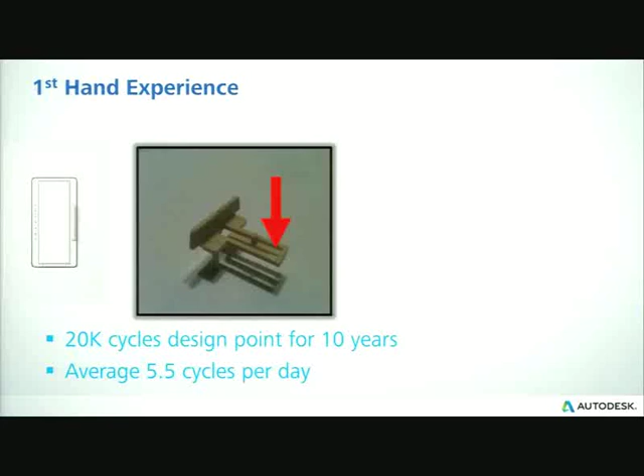So then we built temporary tooling to make some prototypes out of molded plastic. And the thermal side of the problem: in lighting, when you dim a light, you generate heat. So we knew there was a thermal problem.

Right. But we simulated the mechanical problem, and we decided that we would just use physical testing to validate the mechanical problem worked when the electronics were heating up the system.

This product was a very high volume product for Lutron. It was a very important project. When this was put to market, after 3 months, 80% of the products came back because they failed. The plastic broke right where that red arrow is. And we were left embarrassed and confused.

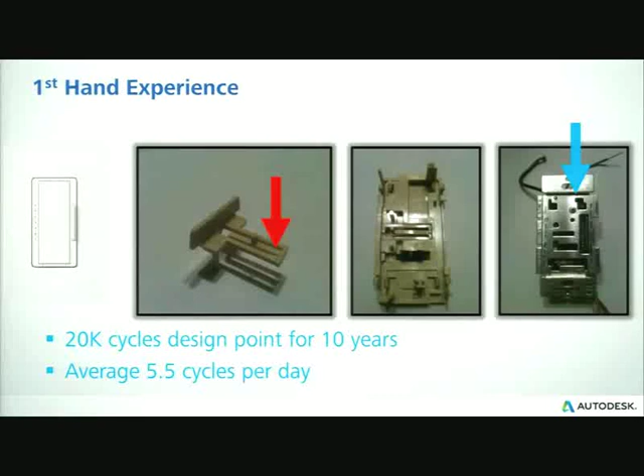What did we miss? So we thought we had a good virtual and physical test plan to build a reliable product. What we missed was that the thermal load isn't constant. So we heated up the dimmer and cycled it very fast. But actually what happens when you cycle it 5.5 times a day, it heats up and then it cools down. It heats up and then it cools down.

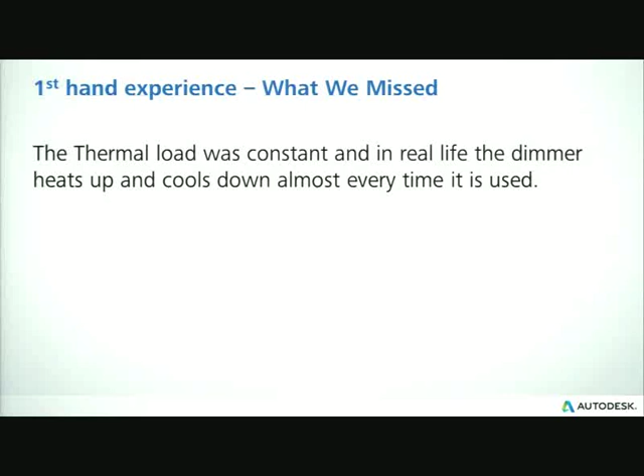So we were cycling on and off every second. After doing some more simulation work with CFD, now we're able to look at the cooling as well as the heat transfer in the mechanisms to identify that it took 30 minutes for the product to fully cool down. So after we adjusted the cycling to 30 minutes, the product failed after 300 cycles, not 20,000.

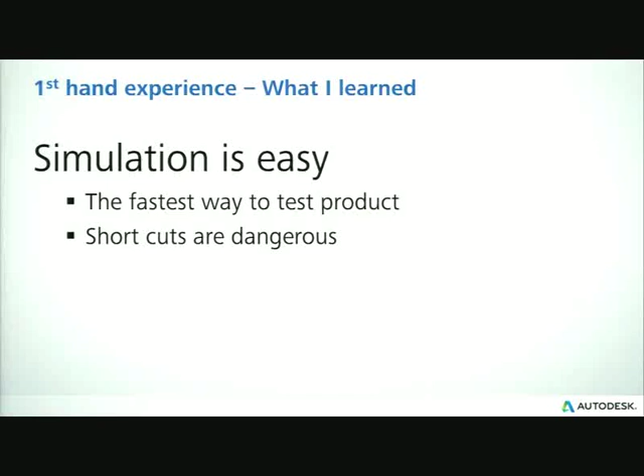It's a lot faster than doing physical testing, so you can make a lot of mistakes inside the computer and do abuse testing a lot quicker. Without exploring your design functionality in simulation completely, you end up taking shortcuts, and those end up being very dangerous to quality.

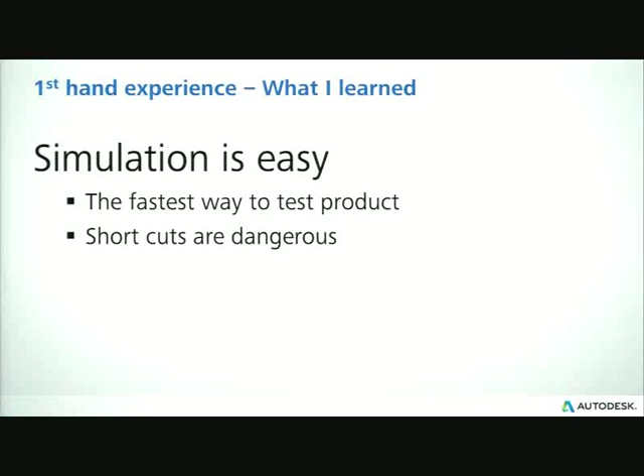The other thing that we all decided was design is what's hard. Designing quality products, designing innovative solutions is a real challenge. Just physical testing makes it take a long time, and you can't abuse test everything. So our goal inside Autodesk, we're a design company, we have great design tools. We're now providing simulation tools for you to make your designs easier, faster, and more reliable in a virtual environment.

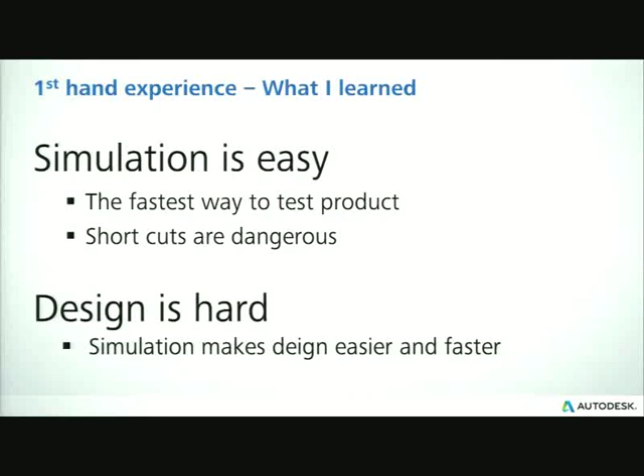Going to switch my machine here so I can show you the product and do a demonstration. It's going to take me a second, so please be patient.

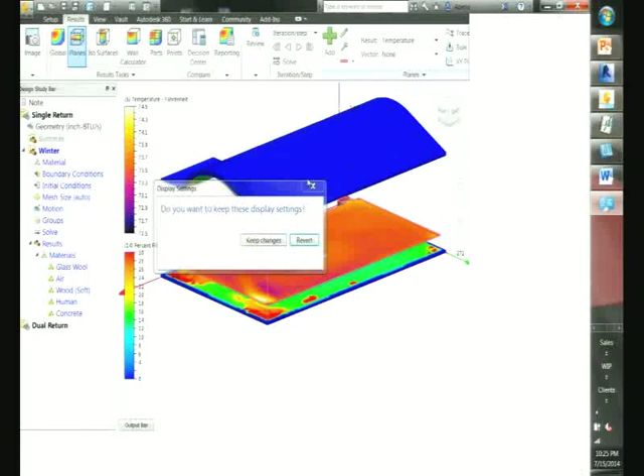We have people in the room today that work in all different types of industries, and as you can imagine, I've been exposed to a lot of them. I have deeper experience in some than others. But one thing I've learned over the years is that simulation speaks the common language of studying your designs and making them better. So what I wanted to show you is something that everybody can understand.

We all work, live, and shop and eat inside buildings. Buildings can be hot, cold, comfortable, or uncomfortable. So I want to show you a demonstration of how simulation is being used to understand the ventilation systems and the solar loading from the windows. Whether you're looking at airflow and heat in a building, an electronics box, or a valve, the workflow is very similar, but how you set the model up is different. When you go through the workshop today, you'll learn the setup for your specific industry.

So just imagine with me, you're building this room.

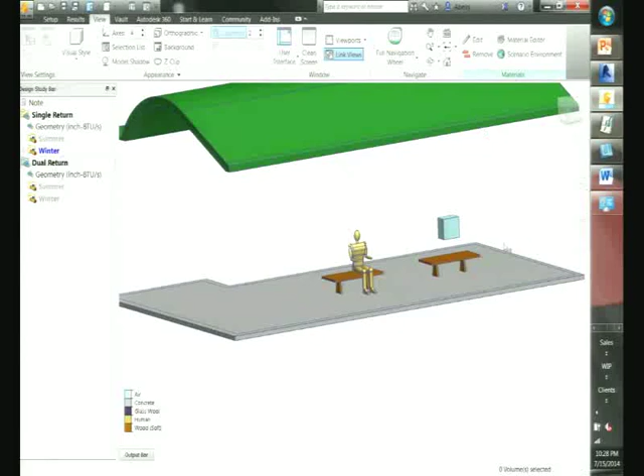So in this room, we have Mark Ma sitting on a bench looking at some really nice piece of artwork. Up top is where the air supply comes in, and down below is where the return is down at the floor, that's where the air leaves. Air comes in, air leaves.

Inlet, outlet. So where the heat comes from, we can model summer conditions and winter conditions.

We can set up to be heating or cooling. We can look at the energy from solar loading, how much energy, and what the external environment is to match these things together. Just like if you're designing electronics for the military or an electronics box, it's going to live in another system somewhere, so it breaks down the system.

So we have heating or cooling, and then we also have the heat from people. People generate a good bit of heat. So the challenge is to design the ventilation system to cool the space uniformly in the summer and heat it up uniformly in the winter.

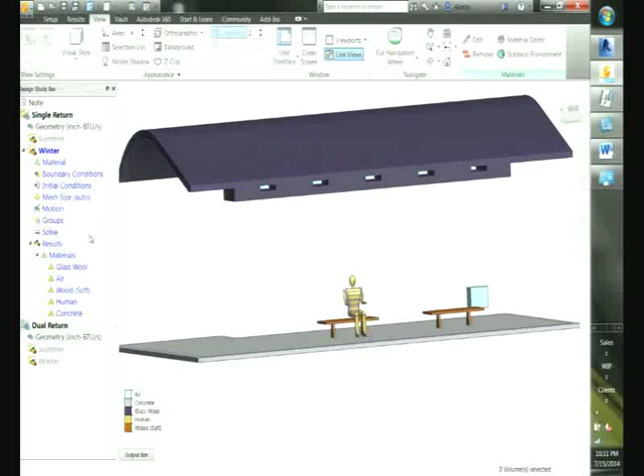Okay, so let's look at some of the results. Simulation is always about looking at the invisible. Let's be able to visualize the air, visualize the heat. Now it's just like any other solid or mechanism that you built. You can learn how to optimize it once you can visualize it.

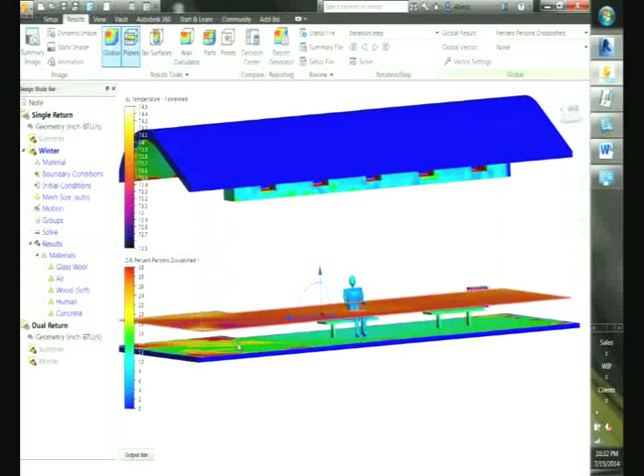So right away, put a plane right where the individual is, and we can see what the temperature looks like. It's around 70 Fahrenheit. We can switch units to Celsius, make it a little bit easier for everybody.

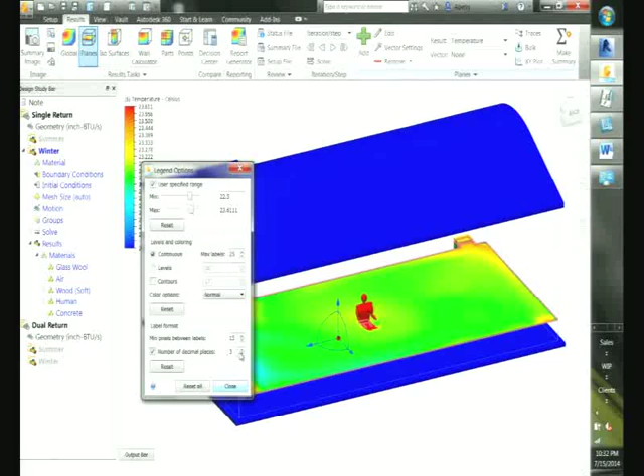So this room is varying between 22 and 24 degrees. Sounds pretty good. We have hot areas, we have colder areas near the glass. But now you can take this plane and just start to drag it up. As soon as we get up to head level, it gets above 24. This could be looking at an electronics box, trying to determine where are the hot regions and the cold regions. How do you isolate temperature-sensitive components from heat-generating components?

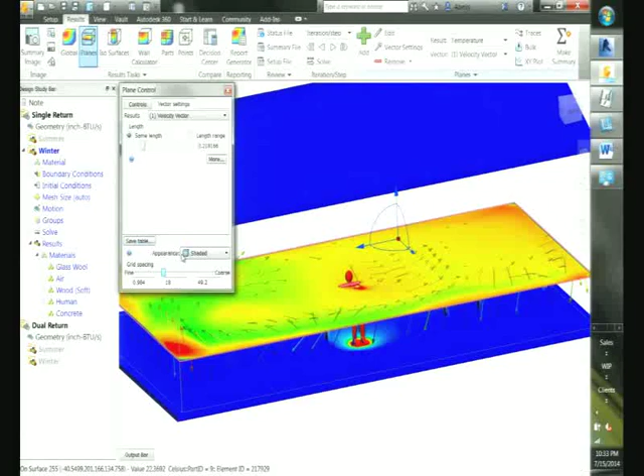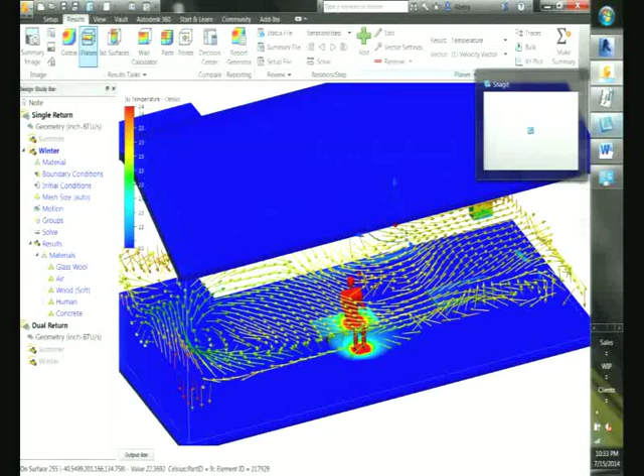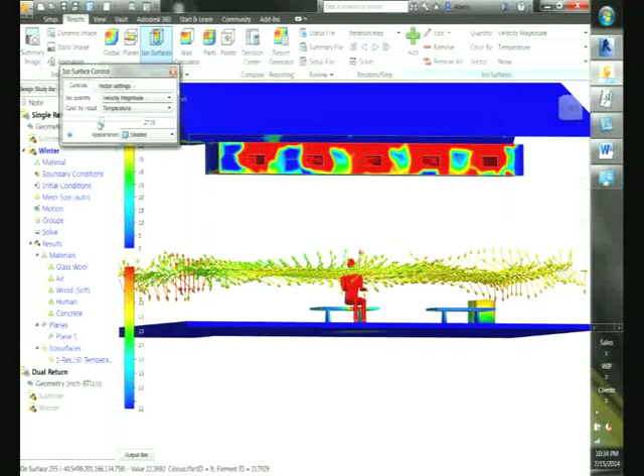So that starts to give you some gradients. Now we can look at flow direction. Visualizing flow direction starts off looking at 2D, but you can get even deeper to understand what the three-dimensional flow looks like. So we're going to create what's called an isosurface, which makes a surface in the results that has the same value of velocity. So you see how the air comes in here. We're in the winter, so the air coming in is hot. Let's hide that. So you see the hot air starts to rise.

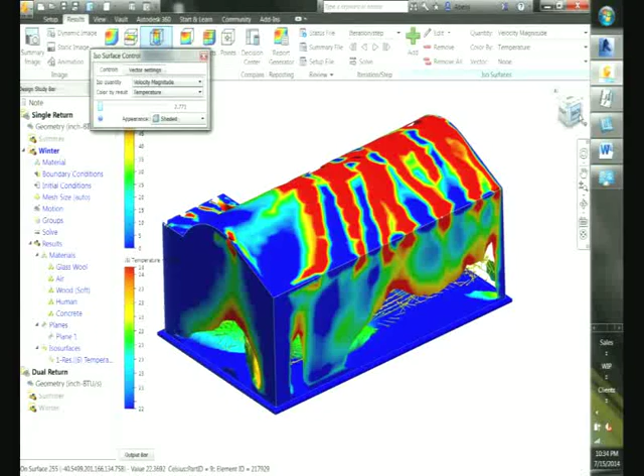So these isosurfaces allow you to drag it through the model and understand what regions of the model in a 3D environment have hot air and cold air.

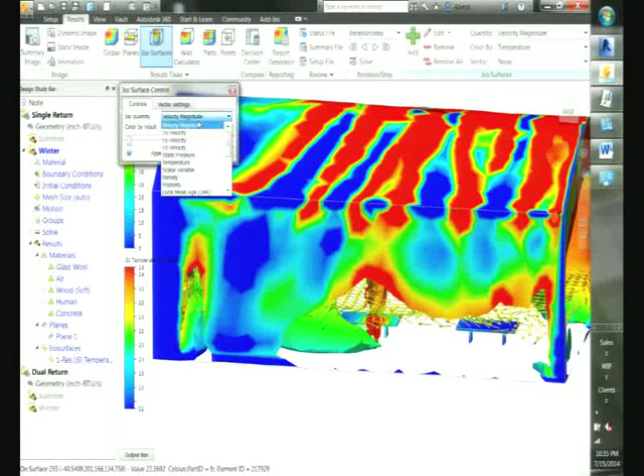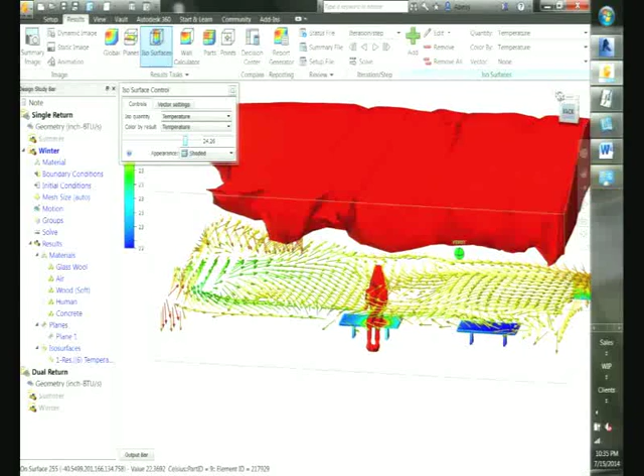Figure out where the hot air is and where the cold air is. So you're looking at either where do you have fast-moving air, where do you have slow-moving air, where do you have high temperatures, where do you have low temperatures. And here you can start to see the hot air rising off of Mark sitting on the bench.

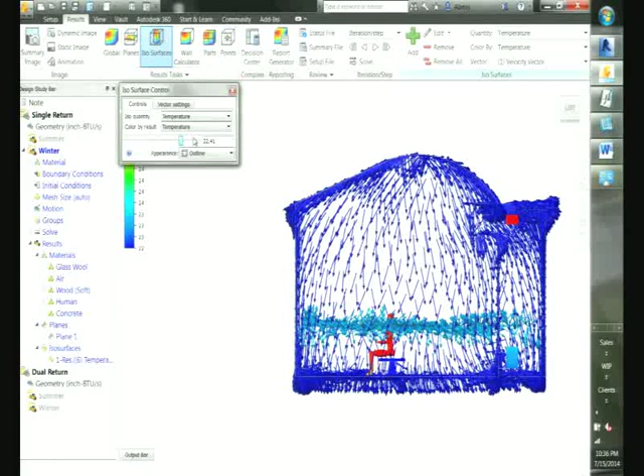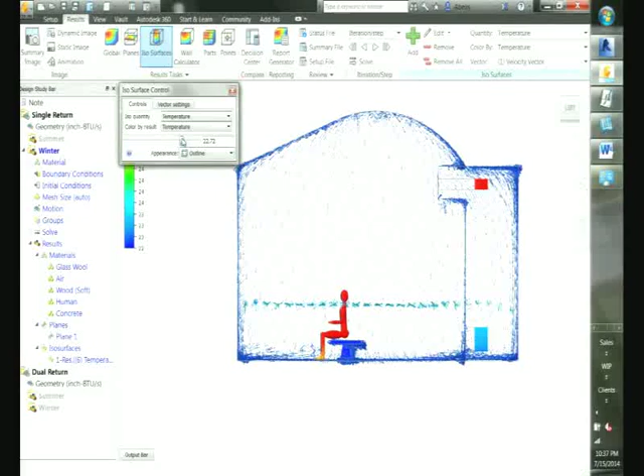And then by looking at the cold temperatures, you get to the outside of the building, where in the winter, the temperature is colder, so the air starts to drop.

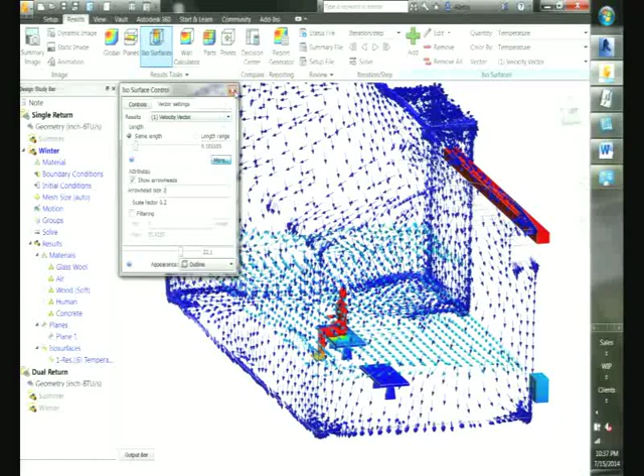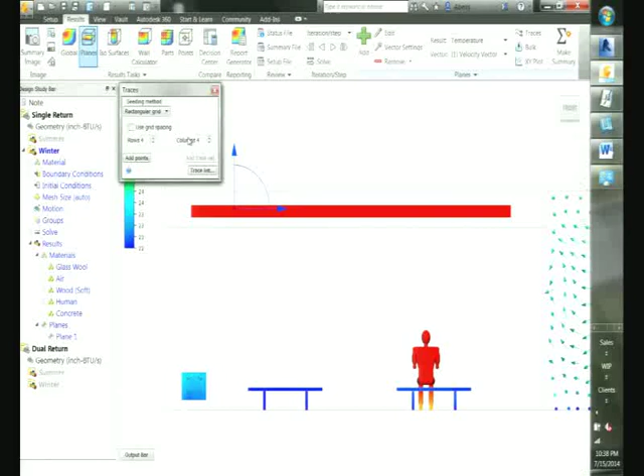Finally, we've looked at temperature gradients, velocity gradients, surfaces of temperature, surfaces of velocity. We can take it one step further to understand what the flow traces look like. So we want to track air particles or dust particles in our system to find out where they go.

So at the inlet here, let's try this. There are a lot of ways you can introduce traces into your model. I'm going to start by just creating a 12 by 4 grid.

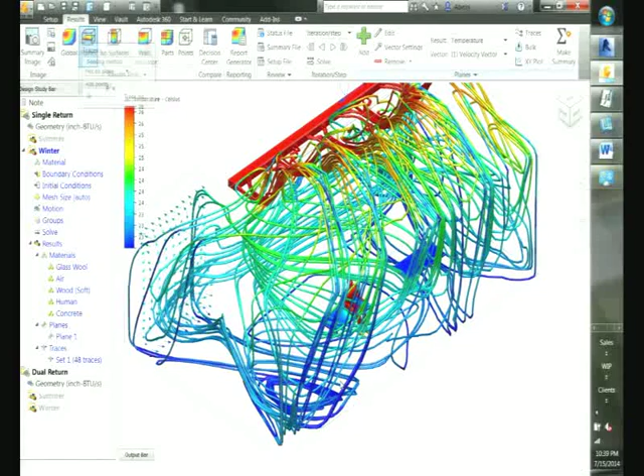Now the air speed starts to come to life a little bit. You see the same type of trends where the air is going along the roof to the bottom, but now you're identifying where flow is recirculating. So this area in the room, the flow is just kind of trapped. It's in the corners. It may be important and may not, but that often leads to hotter components, or it can lead to increased pressure drop inside a valve.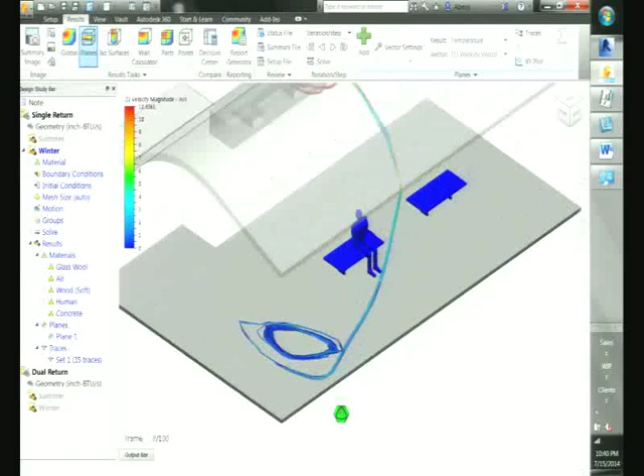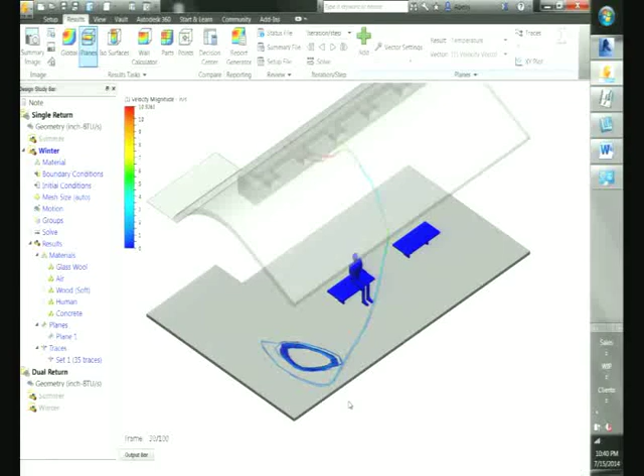So focusing on where that recirculation was happening, you could put a point in that recirculation zone, and the software will back calculate where it came from. So if you look at a cooling design that has multiple inputs and multiple outputs, knowing where the flow goes, which outlet does it go to, is impossible to see in a physical test, but you can point right to it within simulation.

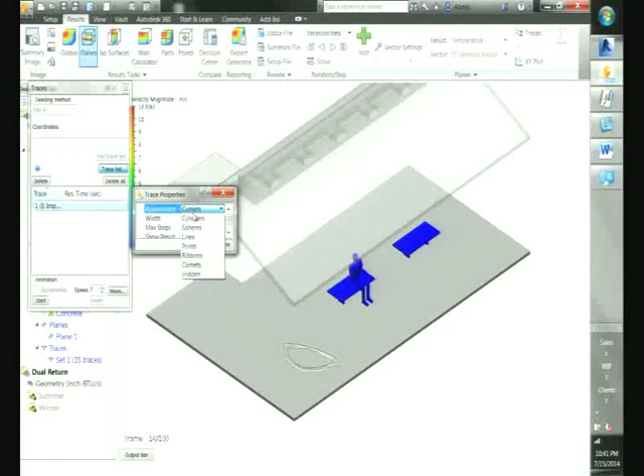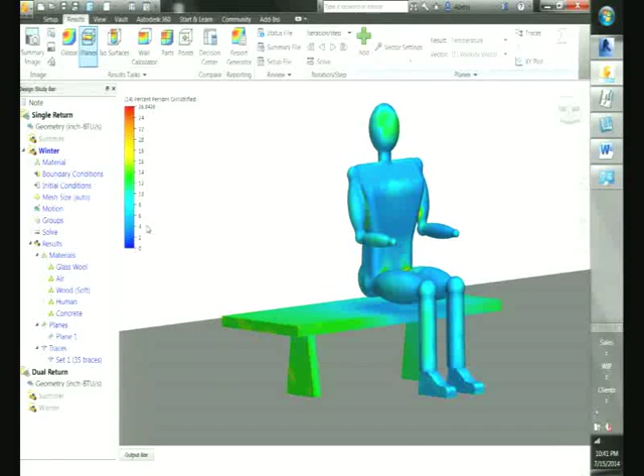In the end, what's most important in the built environment space is comfort. And we look at that as percent person dissatisfied. So if we set the scale here to this person, it's telling you by colors that you're only going to have 3 or 4 people uncomfortable in this space, percent. So it scales it based upon the metabolism rate of the body, the person in the room. We can also look at what the thermal comfort is of the seat. That way, you can dial in the performance for the climate and location and the culture that you're working with.

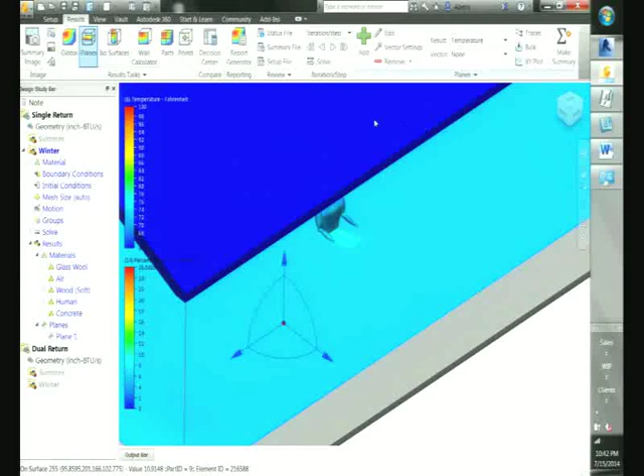We looked at a lot of nice pictures, qualitative results. Looking at one image versus another, it's easy to identify where good performance is and where improvements can be made. But there's also ways to get in and start to extract data on a qualitative approach or quantitative approach. So in this case, we'll just plot from the left side of the room to the right side of the room, and a graph is brought up that shows you what the temperature is across that line.

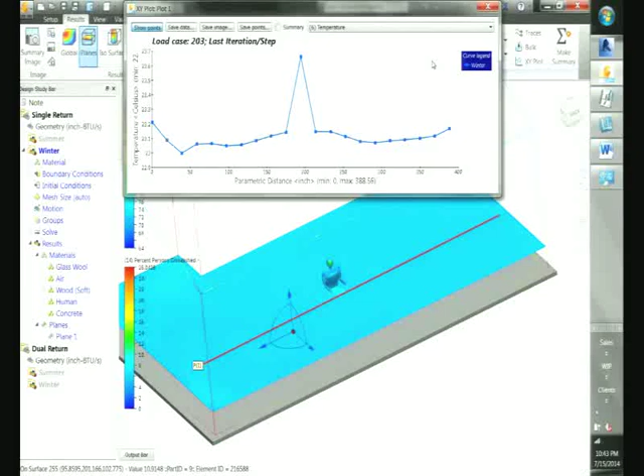The spike here in the middle, if you're curious, is the body heat. The bodies are sometimes the hottest objects in the room, and they can affect the airflow if you have enough of them. When you're looking at the data across your trend line, you can switch to any parameter being solved for. So instead of looking at temperature, we can look at velocity.

Is there a trend or correlation between the temperature and the airspeed? Here, the airspeed on this side is a lot hotter than this side because this side is a window and this is an internal wall. So just like in a building, windows will release energy, walls will contain them. So based upon your electronic design or thermal system, heat exchanger, how well it's insulated can really change the flow situation, and that all leads to inefficiencies.

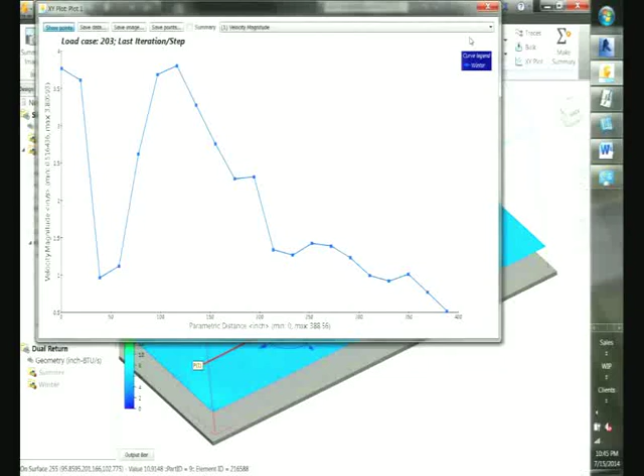Great. So we just spent a good bit of time studying one room in one condition. And this room had one outlet. We noticed that one side has a lot of airspeed and a little bit of energy loss. So the question is, can that be improved?

But also there's a question, how does the system operate in the summer? So once you have one set of results, your design process has just begun. The software is designed for you to scale very quickly. So through cloning, we can create other environmental conditions or materials, or we can bring in additional geometry from any CAD system. And in this case, we added another vent in the left side.

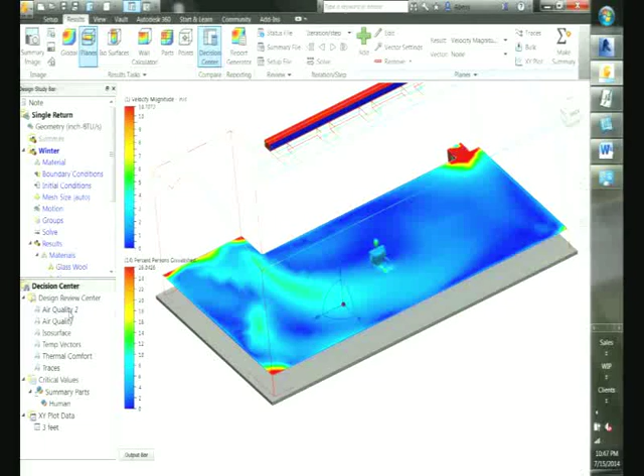So anytime you see data, whether it's a picture or a graph, you can capture it. Now what the software is going to do is gather all that data acquisition across all the different designs and scenarios that you create.

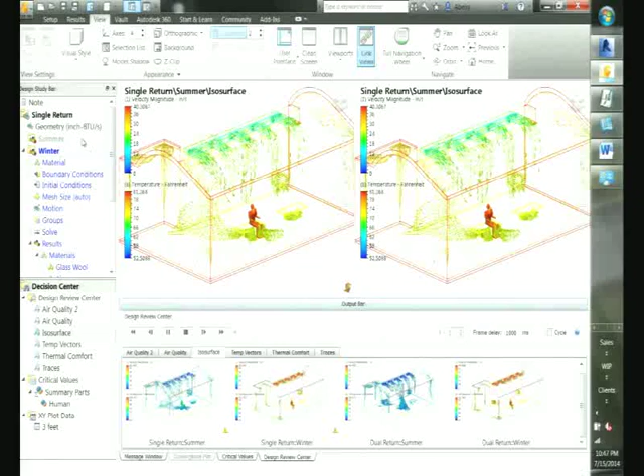This means we can go back to an isosurface. And we want to look at designs side by side. So when you create an image, all the designs now have a thumbnail down below. The data is extracted before you even look at the results live.

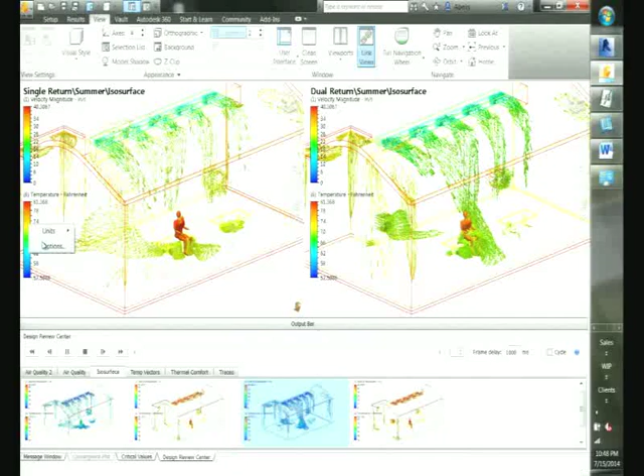Now, in this environment, you're looking at apples-to-apples comparison, meaning that if I change the temperature legend in one model, on the left here, you'll see that this is a single return summer, and on the right is the dual return summer. So once we make that change, the software is going to update and adjust the legend to the dual return on the right, so you're always comparing the same color scale.

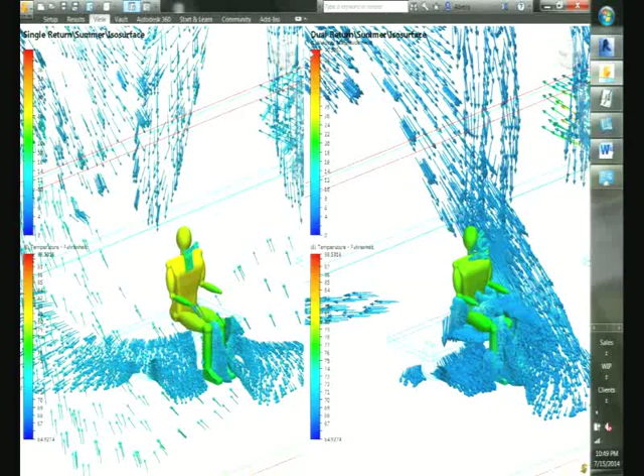So what's really interesting about this, again, we're trying to make this person comfortable. It could be the exact same thing trying to keep a power supply cool. Just by adding another vent, we've now entrained more warm air in the winter, cold air in the summer, so this person now has more cold air directly hitting them at a higher speed. That might be good, it might be bad. What's great about simulation is that you now know, and you can quantify that to make better design decisions with proper information.

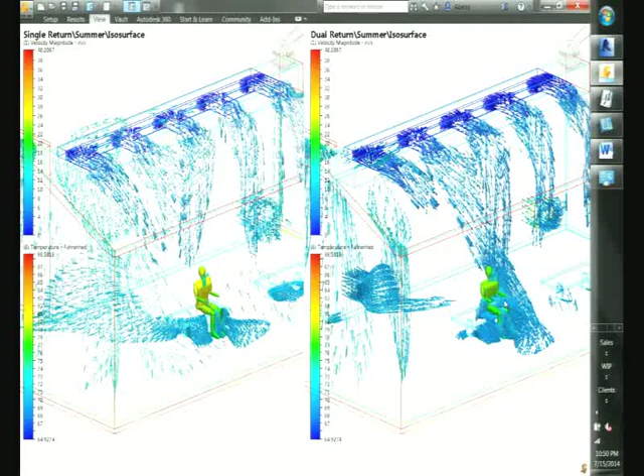So beforehand, I created images here, so you can have access to any image that you look at initially to compare across different designs. Now you can begin to mix and match and put them together.

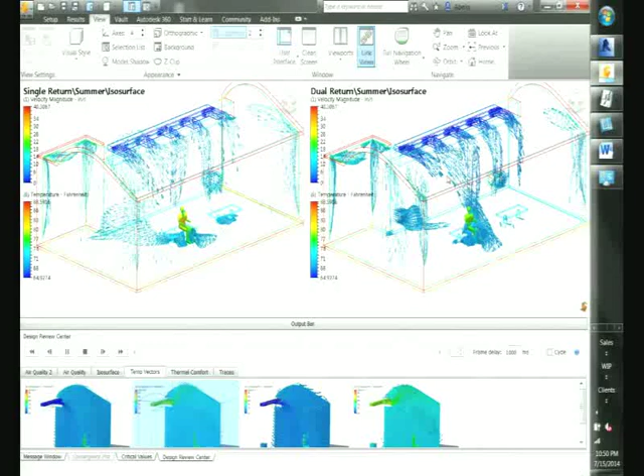So let's study this a little bit more. We want to look at the dual return summer and the single return summer. So you start to see, here's that drafty air hitting the back of the person, and here it's recirculating out the front. So you can start to study it a little bit different.

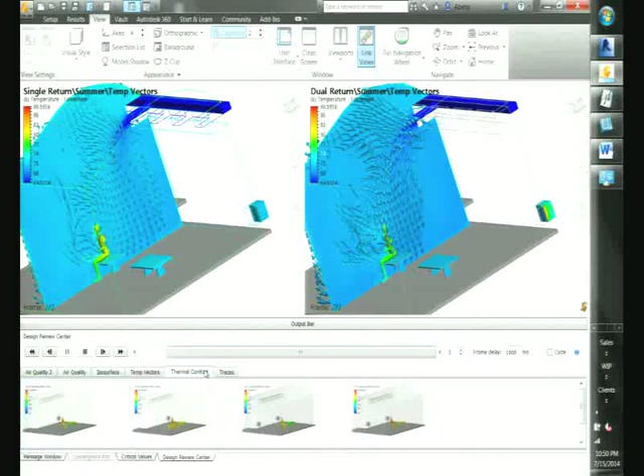And then in the built environment space, we can start looking at things like thermal comfort. And we notice that the dual return actually makes a person a little bit more uncomfortable because of that draft. They're actually a little bit colder.

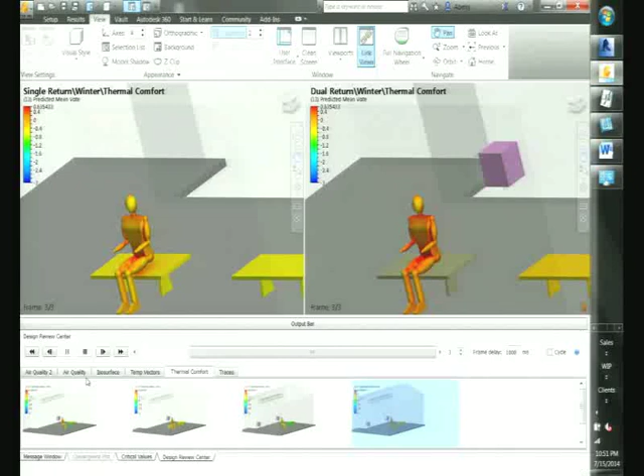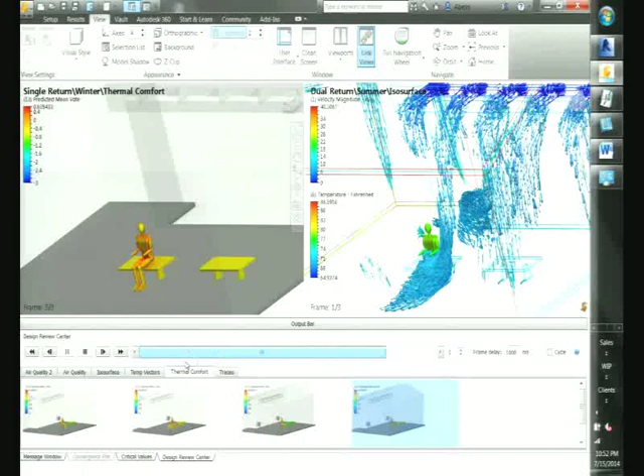So we think the single return is still a better design. So let's compare the single return with the vectors and look at winter versus summer. So in the summer, you see the cold air drops in and cools them off. In the winter, the hot air rises, to heat them up. So the flow fields are completely different depending upon the temperature range that you're in.

So taking it away from the built environment and think about electronics cooling. The way a model runs at 0C and 120C is based upon the natural ventilation and the currents inside that product. Impossible to see.

So it's really hard to understand if your airflows are being choked at the temperature range that you're designing your products to work in.

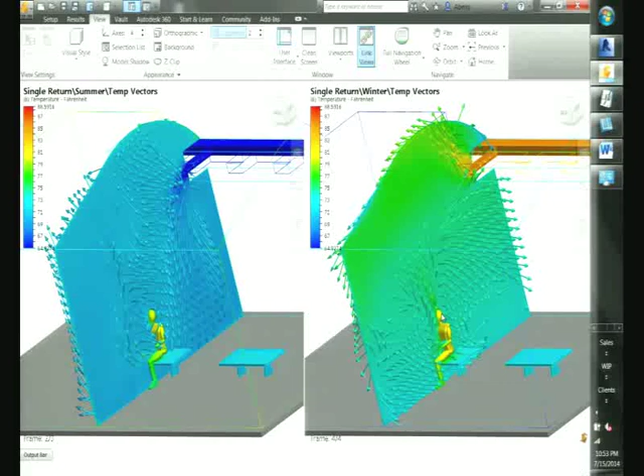So this leaves you with a dilemma. One design is better in the winter, one design is better in the summer. One design could be better in a hot condition, one design could be better in the cold. Which one do you pick, or do you try to find a third design?

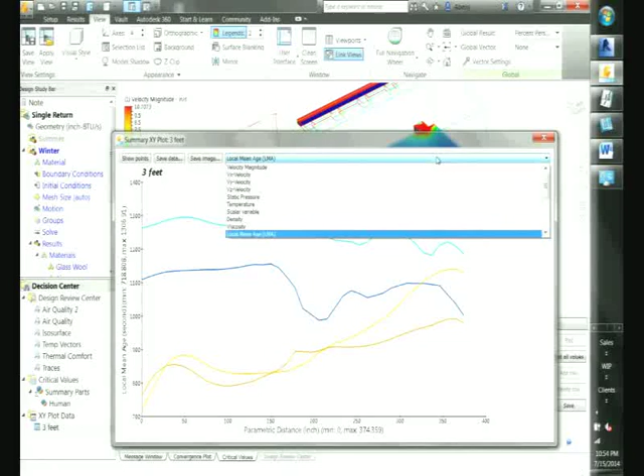Those graphs we looked at before can now be acquired from all the different runs too. So now we're looking at the temperature from the left side of the room through the person to the right side of the room. The blue colors are the dual return. The orange colors are the single return. The summer is the hotter ones of each. So just changing a return and supplying the same amount of air actually changed the mean temperature by 3 degrees.

This is the most common design improvement that are made across industry, whether it's cooling, ventilation, valves. Changing the outlet can have a drastic impact upstream the way flow works. So right-sizing the outlet is the best way to improve your design. And a lot of designs are over-ventilated. There's too many outlets. That means the air is not as predictable and not as controlled. So putting the right size outlet in the right location gives you the highest efficiency.

There are several ways to create a flow volume. You can create it in CAD. You can cap the openings, so Simulation CFD creates it automatically. You can use fluid volume creation tools in Fusion. Or you can use the void fill tool in Simulation CFD. In the second step, specify what you know about the device or system. Assign the materials, set the boundary conditions, and define the mesh.

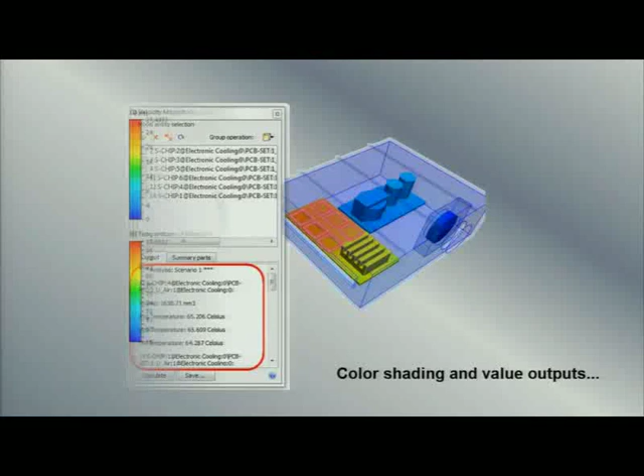In the third step, run the simulation. The simulation runs in a series of small steps called iterations. When the results stop changing, the simulation is finished. In the next step, visualize the results. With these tools, you can understand how your device performs: vectors, traces, and plots, color shading and value outputs, isosurfaces, and more. In the fifth step, explore design alternatives. In many cases, you may want to explore different design concepts. Use the Decision Center to compare results and make informed design decisions.

We'll switch now from the process and get into the interaction basics. This is going to start to introduce how to use the mouse, the keyboard, just how to navigate the model.

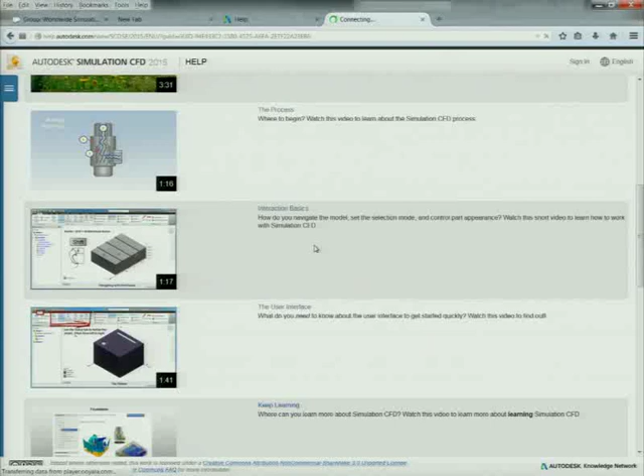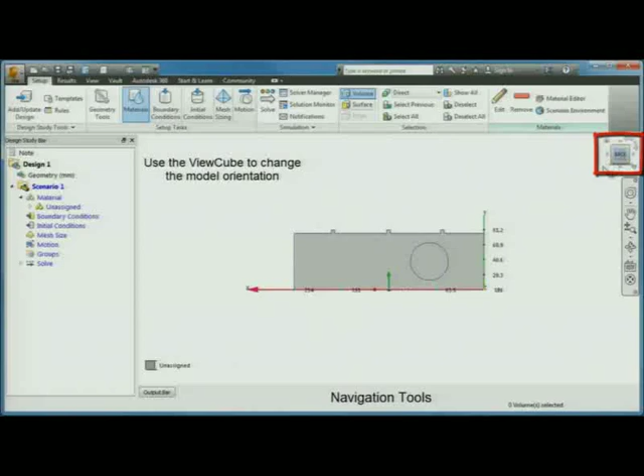You can use the mouse to navigate the model. To rotate, hold Shift and then the mouse button. To zoom, roll the scroll wheel. To pan, hold the middle mouse button. You can also use the navigation tools. Use the ViewCube to change the model orientation. Use the navigation toolbar for greater control.

There are several ways to set the selection mode. You can use the Setup tab, the right-click mouse menu, or the Quick Access toolbar. To hide an object, hold Control while clicking the middle mouse button on the object. You can also use the right-click menu command.

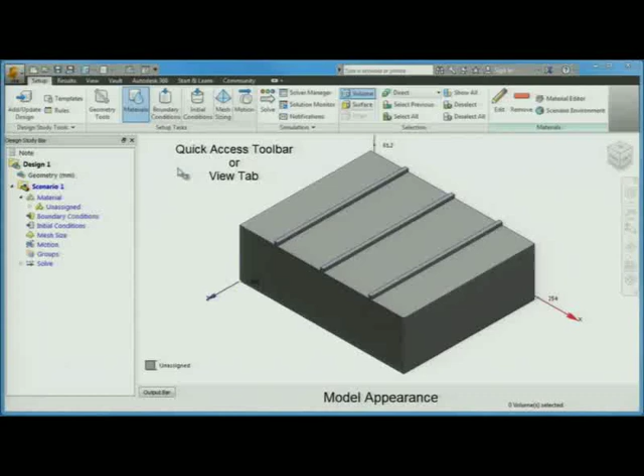To show all parts, hold Control and middle click off the model. To change the model appearance, select from either the Quick Access toolbar or the View tab. To change the appearance of a part, right-click on it and select from the menu.

So we don't expect you to remember all that right now. The exercises will tell you which navigation step to use. It just gives you an overview of what your experience and options are moving forward.

Now the last one here is going to go over the interface. Now this is what really differentiates us from most analysis tools. Coming from the CAD background, workflow and efficiency is so important. And later I'll share with you how Autodesk really develops workflows driven by use cases from people.

This is the graphics window. This is where you interact with your model. Here are some helpful tips. Left-click to open a context toolbar. Right-click to open a context menu. You can check your settings with the legend. In the ribbon, you can find just about any command you need.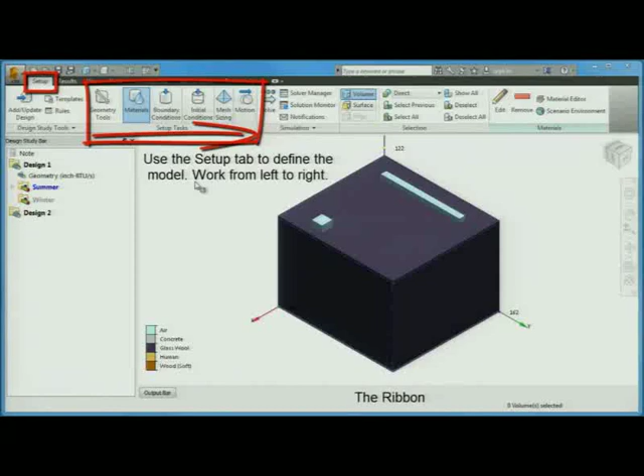Here's some useful tips to help you get started. Use the Setup tab to define the model. Work from left to right. Use the Results tab to view results. Use the tools in any order. You can use the Setup and Results context menus to quickly access often-used commands.

In the output bar, view status updates in the message window. Monitor solution progress on the convergence plot. In the design study bar, an easy way to change the settings is to right-click on it and click Edit. Let's discuss some design study terminology.

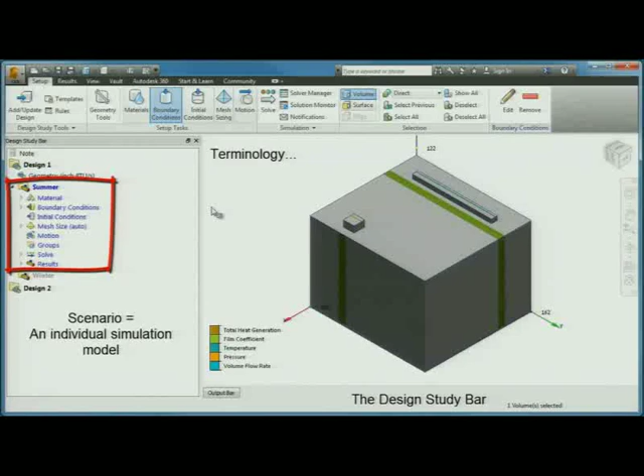A scenario is an individual simulation model. A design is one or more scenarios that use the same geometry. A design study contains one or more designs. You interact directly with the design study file. We can use the decision center to compare design iterations.

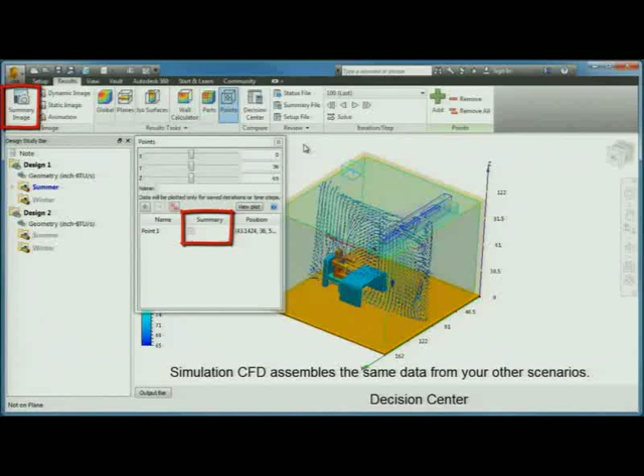Click a summary command to save an item from the current scenario. Simulation CFD automatically assembles the same data from the other scenarios. Manage summary results in the decision center. Compare data in the critical values tab. Compare results images in the design review center.

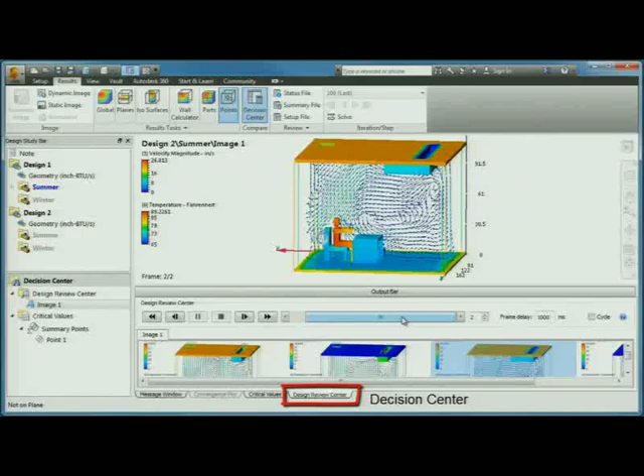Okay, so I hope that's the last video we're going to watch. And they're there so you can watch them anytime you want. This is just on a website. Anybody can get to it, not just our customers. We're very open about our learning tools.

So down below, step 2 is to do a quick start tutorial. You just start by picking which one you want to work on. And there's an overview. Here are all the different steps you're going to go through. Here's where people usually get stuck first. When you're ready, click here to start the tutorial. Very tiny little button there. When you click there, it gets started.

There's videos here that have the same gentleman, Len Whitehead, who does our documentation and learning material. There's a video of him going through the steps. So you can sit there and watch him do all the clicks and picks that you're going to do if you like. Some people learn by watching very quickly. Some people like to learn by reading. So you can watch the video or skip it.

And then down here it tells you exactly what to do. And when you get to the bottom of the page, there's a very, very small little next, just like the small one here. And that takes you to the next step. And you keep working through until you get to the end. You can go forward and back from there.

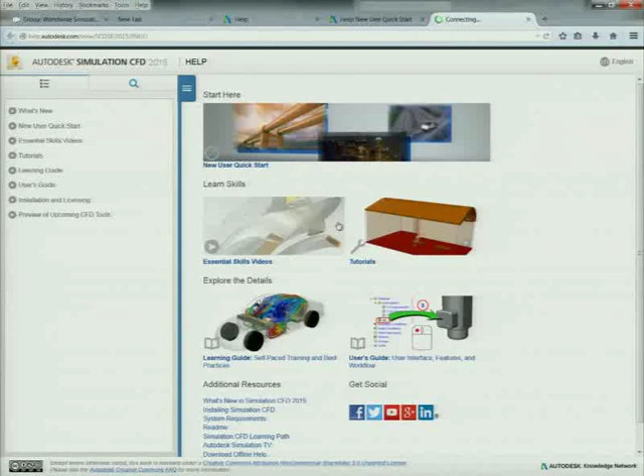All right, so the easiest way to find this page, if you haven't found it already, is in the interface. Just click the little magnifying glass. You don't even have to type in help. It just brings it right up. And you go to New User Quick Start, and then you scroll down to the 3 models.

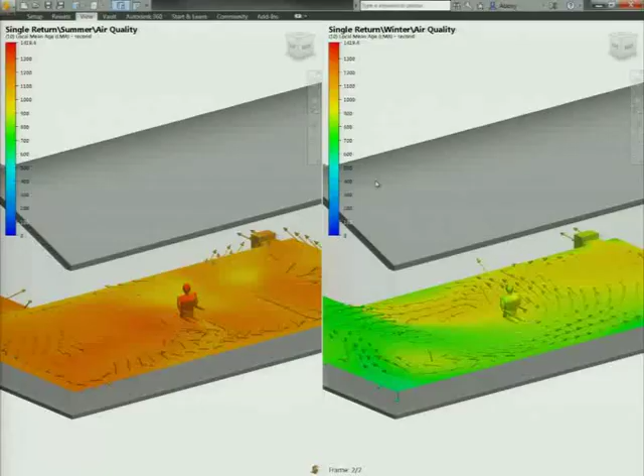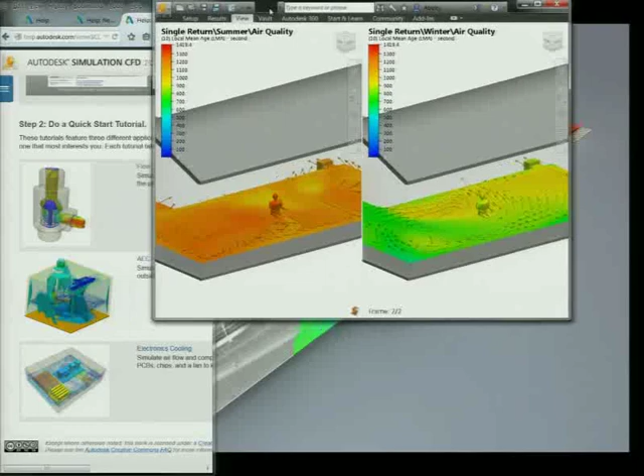Some people like to use the instructions one behind and just switch between them. Other people like to minimize the instruction window to create more of a vertical ribbon on one side of the monitor. And then you can still switch between them like that. Or you can resize the interface to just work on the vertical ribbon to the right.